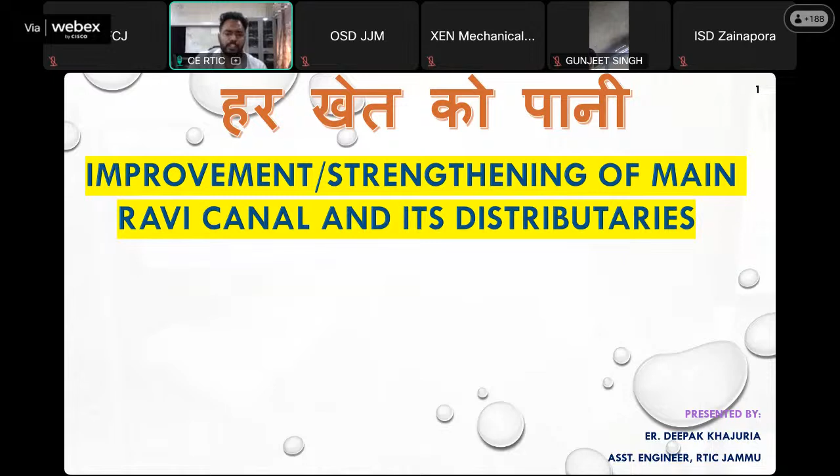Our department is currently working on a project titled Improvement or Strengthening of Main Ravi Canal and its Distributaries, jisme hum apni existing canal network ko restore aur modernize karenge aur saath hi apne distribution network mein kuch naye structures bhi add karenge.

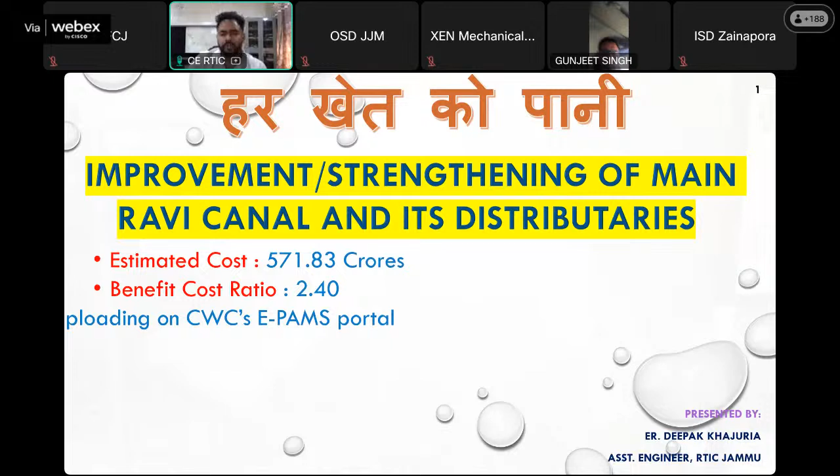इस प्रोजेक्ट की एस्टिमेटेड कॉस्ट 571.83 करोड़ है और इसकी बेनिफिट कॉस्ट रेशियो 2.40 है। ये प्रोजेक्ट हालांकि अभी अप्रूव नहीं हुआ है, इट इज एट द स्टेज ऑफ अपलोडिंग ऑन CWC's EPAMS पोर्टल। आज की इस प्रेजेंटेशन में हम इसी प्रोजेक्ट के बारे में चर्चा करेंगे और इस प्रोजेक्ट की अहमियत को समझेंगे।

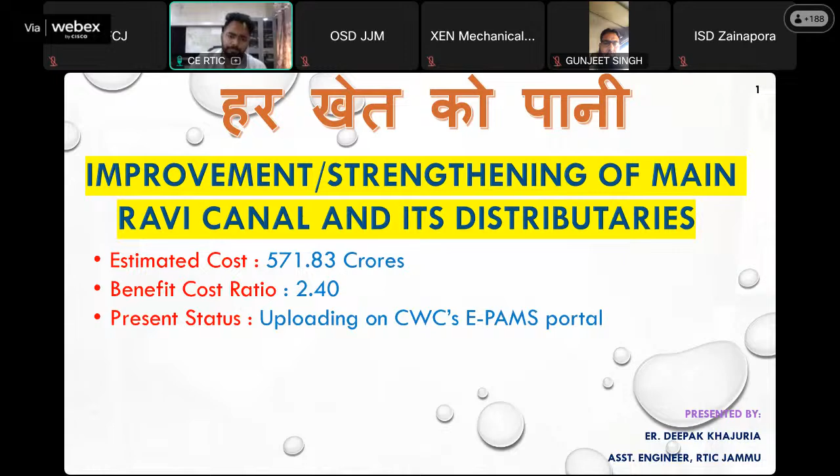देखिए, रावी तवी इरिगेशन प्रोजेक्ट इज बेसिकली अ conglomeration of two canals, namely the main Ravi Canal and the main Tawi Lift Canal, which was envisaged for construction in early 70s.

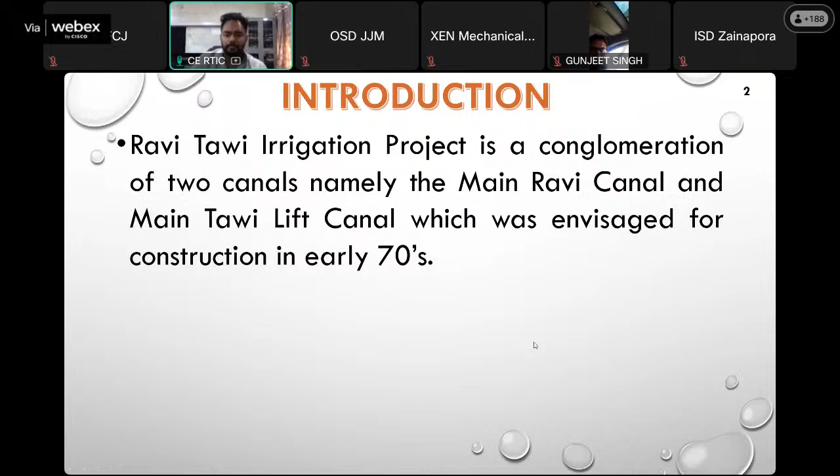आप यहाँ पे जो देख रहे हैं, दिस इज मेन रावी कनाल। अगर हम अपनी मेन रावी कनाल की ही बात करें तो ये कठुआ के बसंतपुर से लेकर विजयपुर के चक सलारियां तक फंक्शन कर रही है, जिसे हम ब्रॉडली दो पार्ट्स में डिवाइड कर सकते हैं।

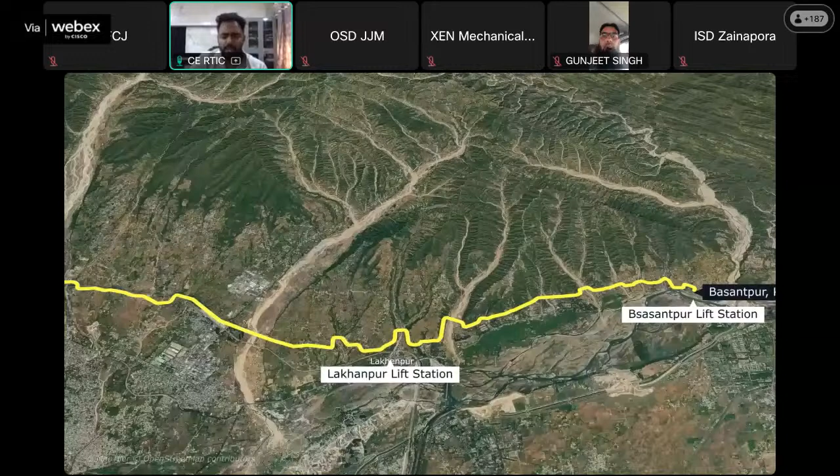पहला हिस्सा बसंतपुर से लेकर उज बराज के लेफ्ट बैंक तक जाता है, जिसमें हमें जो पानी मिलता है वो 2 लिफ्ट स्कीम से मिलता है, लखनपुर लिफ्ट स्टेशन और बसंतपुर लिफ्ट स्टेशन। इन दोनों की रिस्पेक्टिव कैपेसिटीज 200 क्यूसेक्स और 500 क्यूसेक्स है। टोटल कैपेसिटी 700 क्यूसेक्स की होने के बावजूद, ड्यू टू सम शॉर्टकमिंग्स ऑफ दीज लिफ्ट स्टेशंस हमें एमआरसी में केवल 300 से 350 क्यूसेक्स का ही डिस्चार्ज मिल पाता है।

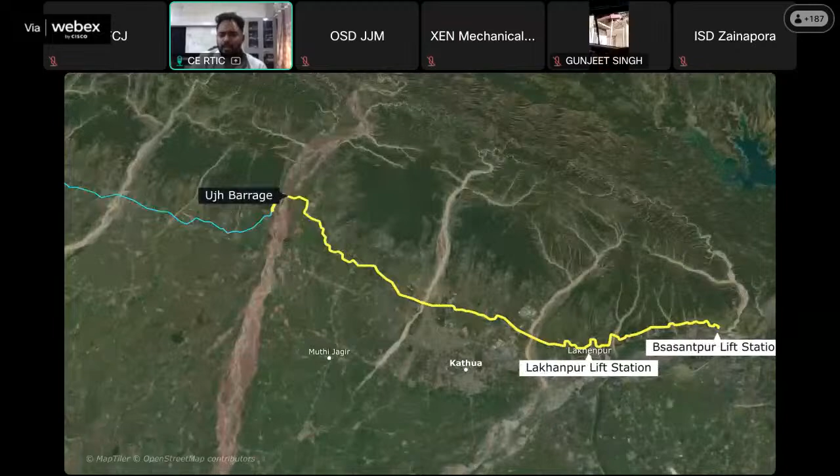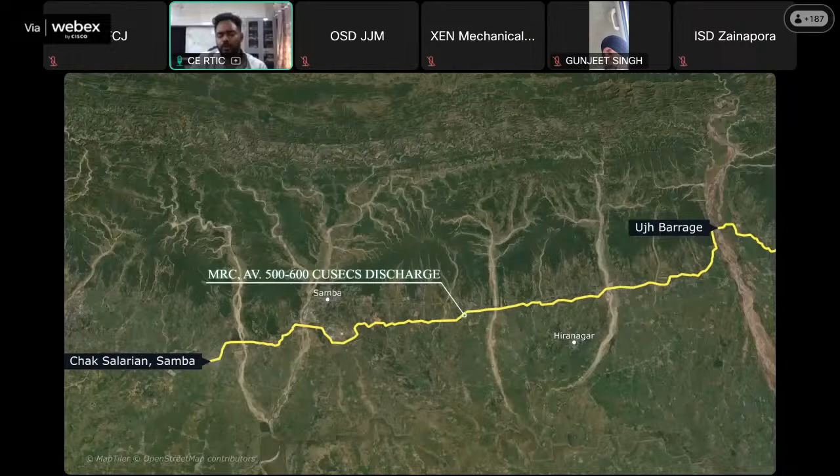दूसरा हिस्सा उज बराज के राइट बैंक से लेकर चक सलारियां तक जाता है, जिसमें हमें जो पानी मिलता है वो उज बराज से मिलता है, जो हमें अमूमन ऑन एन एवरेज 500 से 600 क्यूसेक्स का डिस्चार्ज दे देता है। हमारी इस मेन कनाल का डिजाइन डिस्चार्ज 1150 क्यूसेक्स है, जो कि हमें जल्दी ही शाहपुर कंडी डैम के कंप्लीट होने पर मिलने लगेगा।

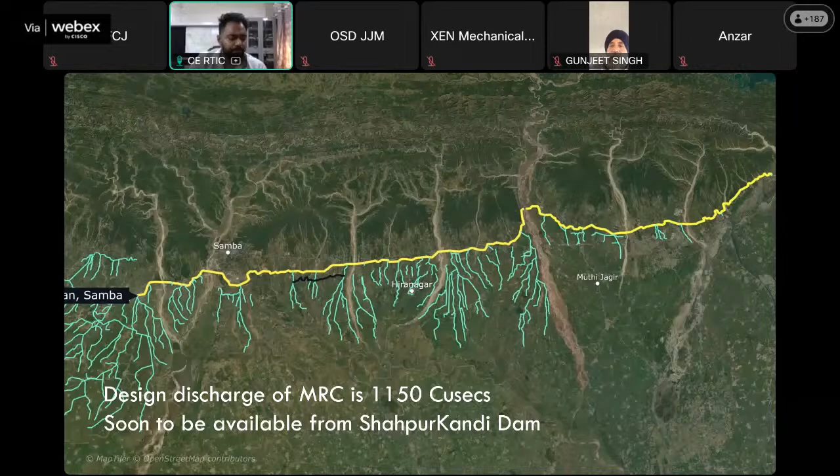एंड टू प्रिपेयर अ कनाल टू efficiently carry and distribute this discharge, this is what our project is all about. Now have a look at some historical background of the Ravi Canal.

देखिए, जनवरी 1955 में जो रावी के पानी को लेकर इंटरस्टेट एग्रीमेंट हुआ था, उसमें जेएनके को 0.69 एमएफ पानी एलोकेट किया गया था। बैलेंस 0.475 एमएफ पानी।

जेएनके को रावी कनाल के थ्रू रंजीत सागर डैम से मिलना था, जबकि 0.215 एमएफ पानी जेएनके करंटली कठुआ कनाल के थ्रू ले रहा है। अब रावी कनाल के थ्रू रंजीत सागर डैम से पानी लेने के लिए 1972 में रावी कनाल की कंस्ट्रक्शन का प्रोजेक्ट फॉर्मुलेट हुआ, जो 1973 में अप्रूव हुआ, एंड फाइनली इन 1975 द कंस्ट्रक्शन ऑफ कनाल बिगन।

1980 के आते आते हमारी कनाल नेटवर्क का 90% कंस्ट्रक्शन पार्ट कंप्लीट हो चुका था, और बसंतपुर से रंजीत सागर डैम तक इसे कनेक्ट करने के लिए हमें 3.25 किलोमीटर की टनलिंग की जरूरत थी, एंड देयर वर अ लार्ज स्ट्रेच जहां की हमें क्लोज कॉन्ड्यूइट्स भी बनाने थे।

सो 1979 में जो इंटरस्टेट एग्रीमेंट हुआ जेएनके और पंजाब गवर्नमेंट के बीच, उसमें ये डिसाइड हुआ कि बजाय रावी कनाल को रंजीत सागर डैम से कनेक्ट करने के, इसे रंजीत सागर डैम से 7.5 किलोमीटर डाउनस्ट्रीम प्रपोज शाहपुर कंडी डैम से कनेक्ट किया जाए।

इससे जो डिफिकल्ट स्ट्रेच था स्टार्टिंग का रावी कनाल का, उसे कंस्ट्रक्ट करने की भी जरूरत नहीं पड़ती, और साथ ही जो बैलेंस पोर्शन की लेंथ थी वो भी रिड्यूस होकर 1378 मीटर रह जाती। और इन एडिशन टू दिस, ये जो 1378 मीटर का स्ट्रेच था, ये भी शाहपुर कंडी डैम अथॉरिटी द्वारा ही बनाया जाना था। सो दिस प्रपोजल वाज वेल एक्सेप्टेड बाय द जेएनके गवर्नमेंट।

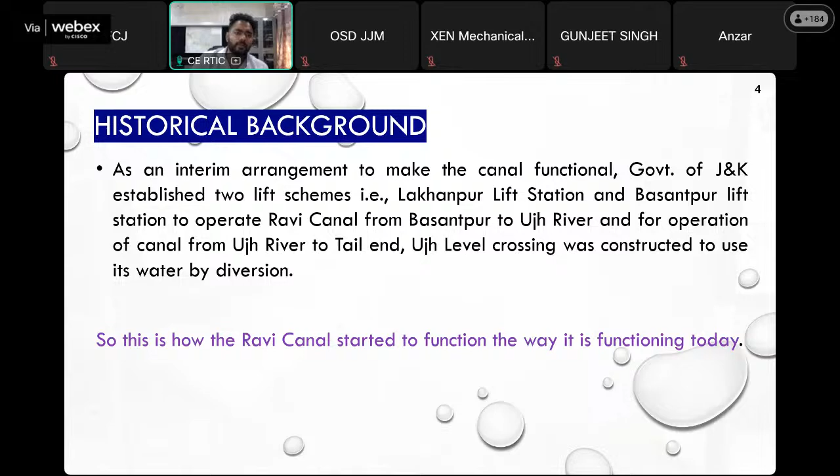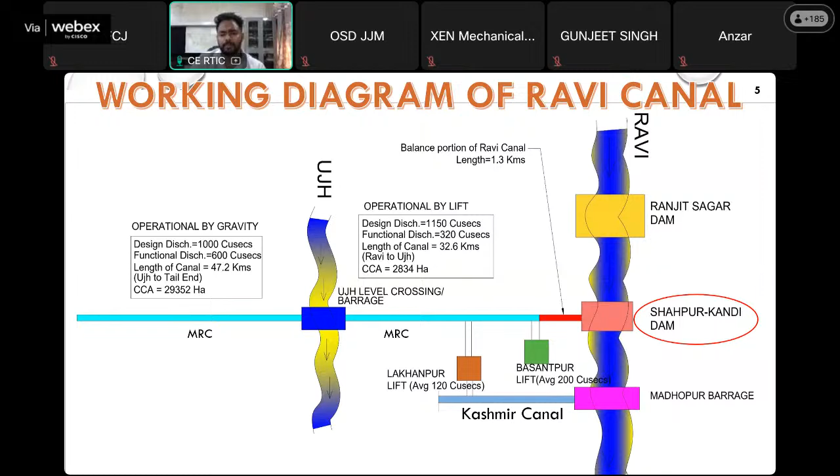अगर हम इसी बैलेंस पोर्शन की बात करें रावी कनाल की, विच इज 1.378 किलोमीटर्स टू बी प्रिसाइज, दिस इज बीइंग कंस्ट्रक्टेड बाय शाहपुर कंडी डैम अथॉरिटी एज पर द एग्रीमेंट साइंड बिटवीन द गवर्नमेंट ऑफ जेएनके एंड पंजाब। Almost 90% of the work has been completed and is expected to complete by June 2024 as stated by Shahpur Kandi Dam Authority.

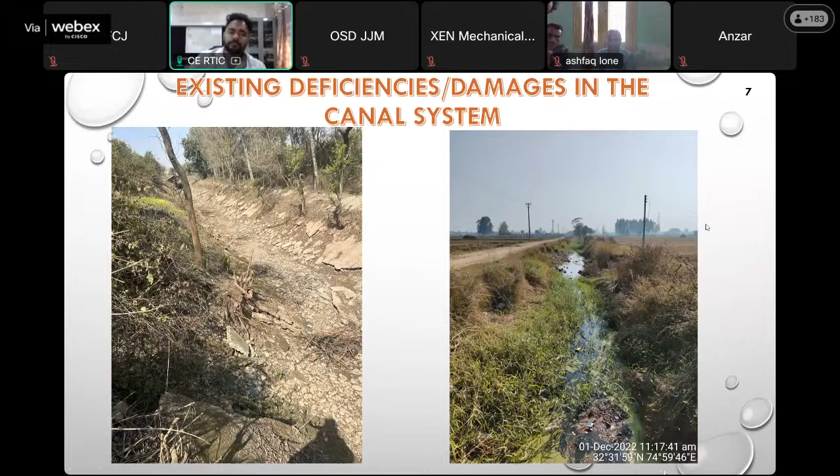So there are many existing deficiencies in the canal system. Due to insufficient funding and subsequently lack of proper maintenance, the canal system is in damaged condition over the past several years. The distribution system particularly is in bad shape and has lost its design carrying capacity. Several structures and the canal lining have been damaged. There's extensive growth of vegetation and plants inside the canal prism. There have been recurrent breaches and slips in several vulnerable embankment reaches. The deep cut reaches have suffered extensive damages due to slope slip, rock falls, collapsed lining, etc. So the net result is a significant reduction in the irrigated area in comparison to the command area.

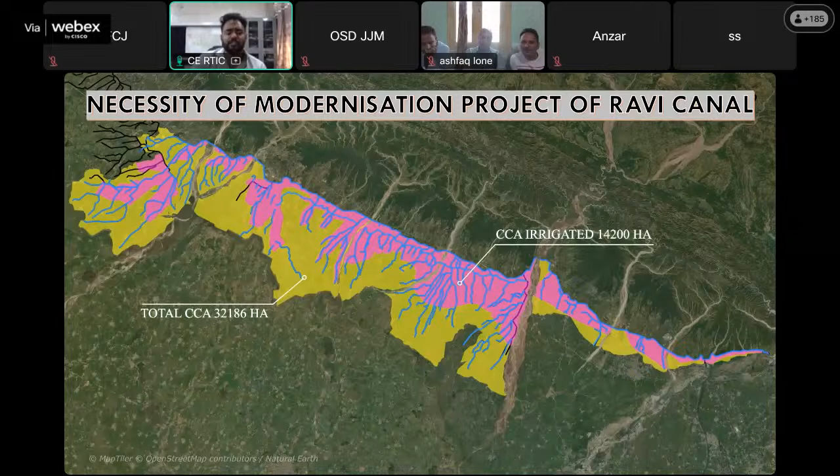Now these are some of the salient features of the Ravi Canal. Source of water is of course river Ravi. The type of canal is a contour canal. In simple terms, a contour canal is one which traverses almost parallel to the contour lines. Because of this, only one side of its course is irrigated by this type of canal. And if we talk about Ravi Canal, it irrigates its left side.

If we talk about the cultivable command area, which is 32,186 hectares, making up 79,500 acres, with an irrigation intensity of 168%, which makes the ultimate irrigation potential equal to 54,072 hectares. One thing I'd like to point out here is that this CCA is among the largest CCAs in the J&K Union Territory.

The length of the main canal is 79.8 kilometers. The length of the distribution canal system is 520 kilometers, and mind you, this distribution network is the largest individual canal network in the whole Union Territory of J&K. The bed grade of the canal is 1 in 3,300 meters. The design discharge is 1,150 cusecs, and again, this is the highest among all individual canals in J&K UT.

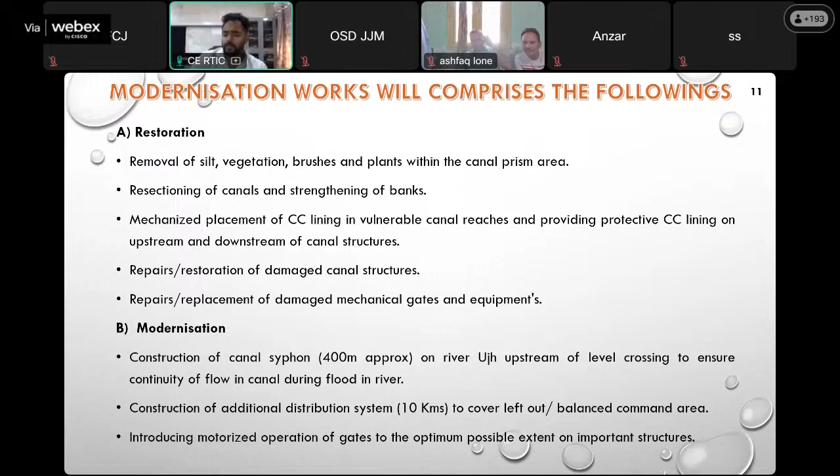Now, this is a general abstract of the work. As you can see, out of the 79.8 kilometers of total length of the main Ravi Canal, we are taking up 37.55 kilometers of the length under modernization, and this covers mostly the filling stretch of the main Ravi Canal.

Out of 46 siphons, we are taking 27 siphons under the modernization. 8 out of 9 aqueducts and 6 out of 10 escape gates are also taken under the project.

In the distribution network, the total length of 520 kilometers, we are taking up 239.25 kilometers out of it for the modernization. And out of a total 730 other structures, we are covering 456.

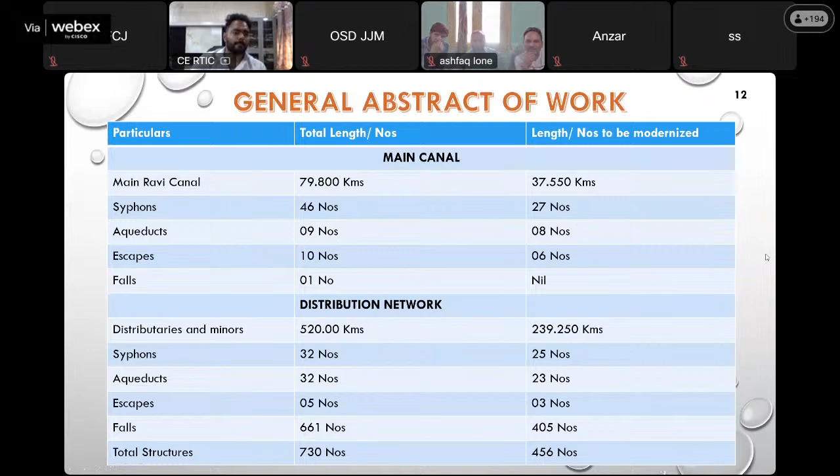These are some salient features of the detailed project report. The districts covered under the project are Kathua and Samba. The tehsils that come under are Kathua, Marheen, Hiranagar, Ghagwal, Rajpura, Samba, Vijaypur, and Ramgarh.

The project cost is rupees 571.83 crores. The benefit cost ratio is 2.40. Ultimate irrigation potential is, of course, 54,072 hectares, as mentioned earlier, and the beneficiaries are 7,544 families.

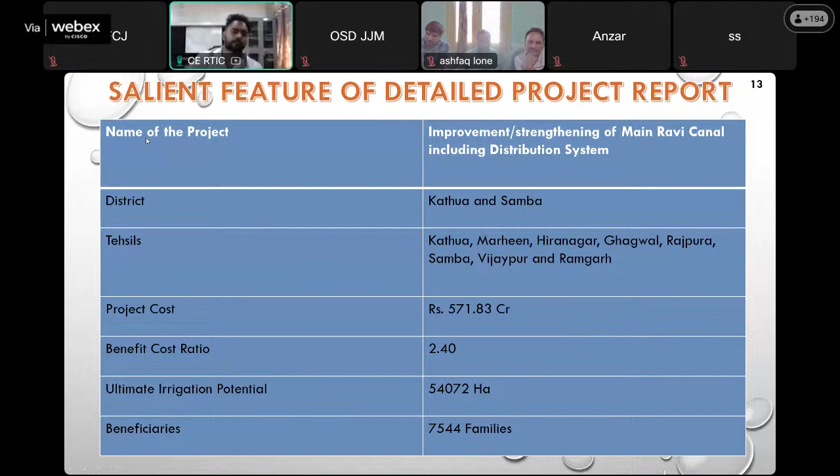Now, in the implementation of the project, there are some challenges as well. Let's have a look at the pre-approval challenges of the project first.

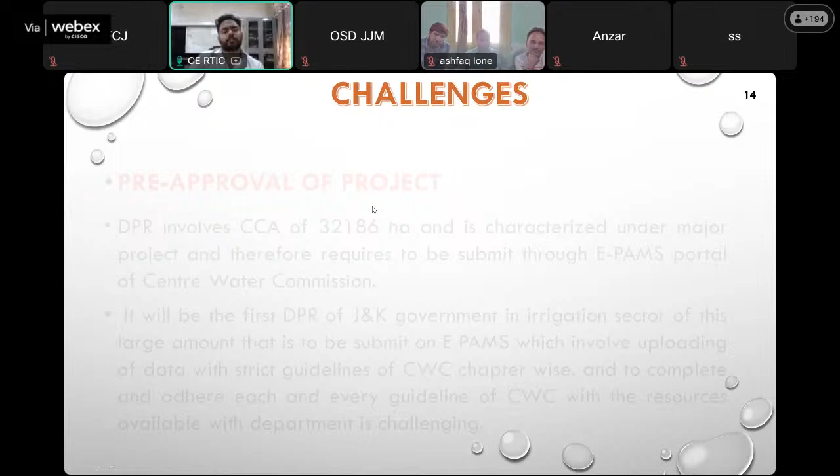The DPR involves CCA of 32,186 hectares and is characterized under a major project, and therefore requires to be submitted through the EPAMS portal of the Central Water Commission. It will be the first DPR of J&K government in irrigation sector of this large amount that is to be submitted on EPAMS, which involves uploading of data with strict guidelines of CWC chapter-wise, and to completely adhere to each and every guideline of CWC with the resources available with the department is challenging.

Now, there are some post-approval challenges as well regarding the project. For the execution of work in the functional canal, there has been only 3 months working time available, which is the closure period.

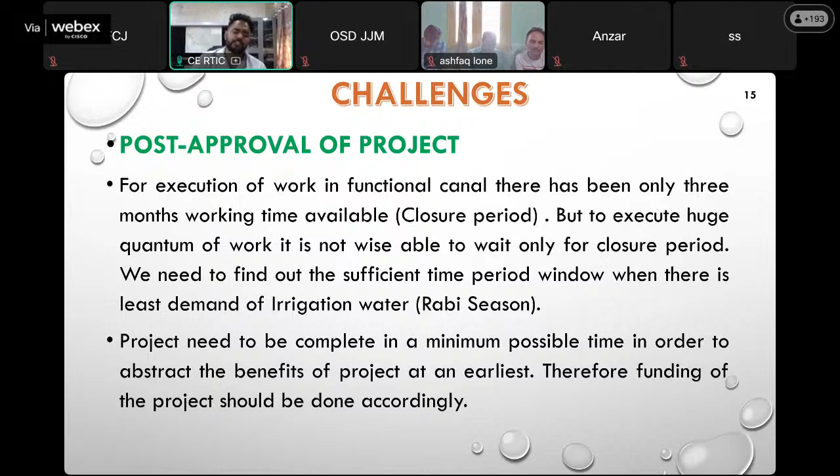Now, here is a briefing of whatever we have discussed earlier. The project of improvement and strengthening of main Ravi Canal and its distributaries is of utmost importance, and the canal network is spread in 2 districts irrigating the arid region, and it has a potential to irrigate a significantly larger area than it is irrigating presently.

It took so long to get the allocated share of Ravi water, and when it is at our doors, we should better be prepared to receive that share that belongs to us with both hands. Ravi Canal irrigation is among the largest irrigation networks in the Union Territory, and with the approval and execution of the project, it will be able to operate at its full potential, and then we could proudly say, yes, we have provided har khet ko pani.

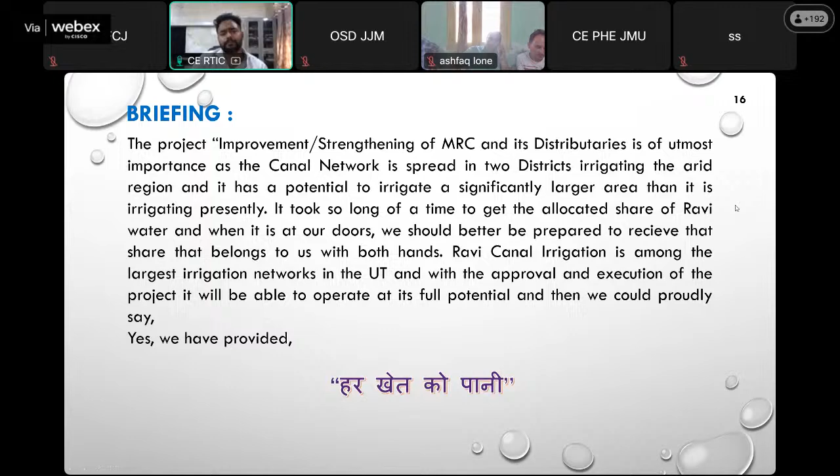Well, the presentation doesn't end here. There are some additional benefits of the project. One of them is saving in groundwater usage.

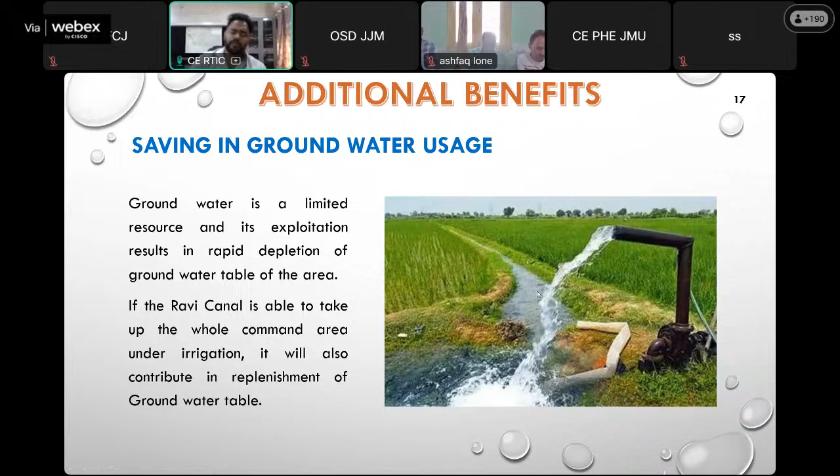I'm Shakil, Executive Engineer, PHE, Budgam. Hello sir, good evening.

When you were preparing the survey and DPR, had you hired any consultants for the same? No, it was all done in-house by the department itself. Only the department personnel engaged in this, sir. We have not consulted any consultants.

My question is, are there any measures put in place for measuring the discharge of the canal at any point of time? And what is the velocity when you have a 1 in 3,300 meter bed slope?

The velocity we are having is almost 1.3 meter per second, sir.

To all the participants and the chair, I, Nawaz Ahmad Bhat, Executive Engineer, Jal Shakti Kulgam, am going to present on planning and designing of the water supply scheme. The basic objective of planning a water supply scheme is to supply safe and wholesome water to the consumers.

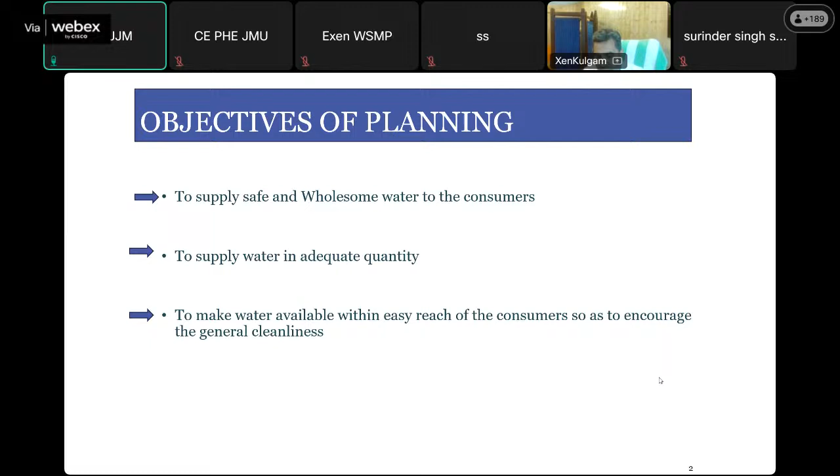Nawaz sir, your voice is not that clear, please go nearer to your system. The basic objective of planning is to supply safe and wholesome water to the consumers, to supply water in adequate quantity, and to make water available within easy reach of the consumers so that there is general cleanliness.

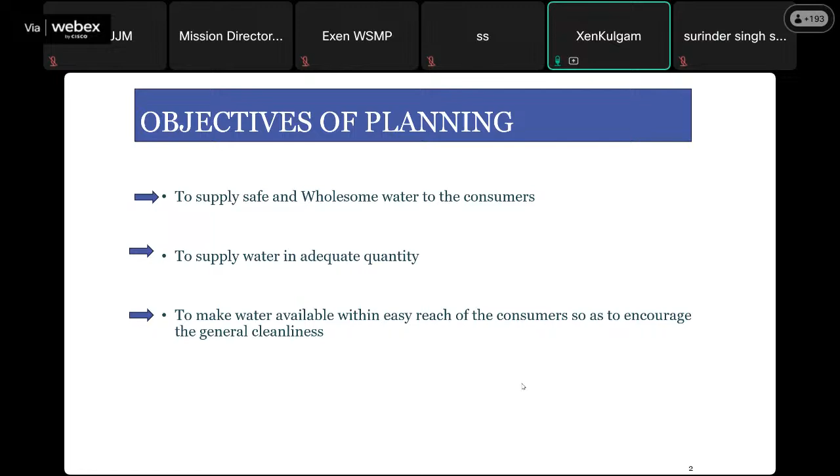The planning of a water supply scheme, sir, depends on these factors: the source, the quantity or quantum of water required, the quality of the raw water, the rate of consumption of water, the topography of the area, and the future demands.

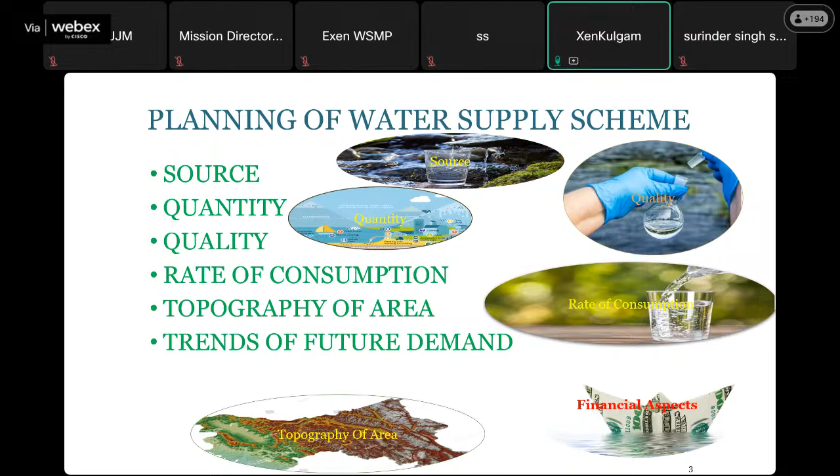These are the main factors that govern our water supply scheme, that govern the planning as well as the design of the water supply scheme. Out of these various factors, we have two factors, the source and the topography, that govern the type of scheme that we should plan.

If we have a sufficient quantum of water available and the topography is favorable, so that we can maintain the functionality requirement of the consumers and maintain a requisite pressure, which as per CPHEEO guidelines is 7 meters for a single story building, then we can go for a gravity scheme.

However, if the source is available but the topography is such that water can't flow by gravity from our source to our end users, then we have to go for a lift scheme. So these two factors are mainly responsible for selecting the type of scheme.

Whereas factors like quantity, rate of consumption, and future demands would give us the design of the pipe, how big our scheme should be - that is the diameter of the pipe.

In rural areas, we have small hamlets, usually 300 households, 400 households, or at max 600 households. So the design of pipes would be accordingly. Mostly it goes to 150 mm to 200 mm, and in case it is a multi-village scheme, it can go up to 300 mm, not more than that.

Then there's the quality of the raw water. The quality of the raw water would give us the type of treatment that we should adopt. If there is smell or odor in the raw water, then we have to go first for aeration.

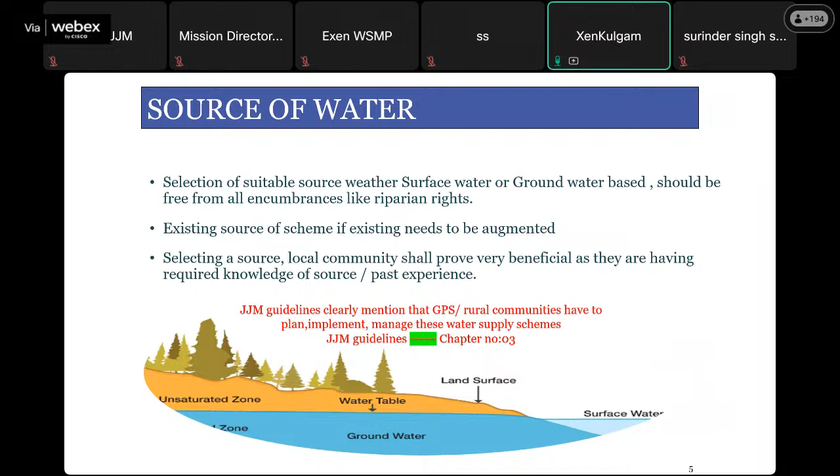Planning of the siting and location of the structures. So this infrastructure needed for a particular water supply scheme - the filtration plant, the sedimentation tanks, the storage reservoirs - would solely depend upon various factors, out of which topography plays an important role.

It's the topography that governs where our filtration plant should be, where our storage structure should be. Should my filtration plant and the service reservoir be located more towards the source, or more towards the population, or in between? That all depends upon the topography of the area.

So for an efficient water supply scheme, we have to calculate the exact location of these two important infrastructure units of the water supply scheme.

If it is located too much towards the source, then the water drawn from the pipes towards the community - we know that for all those pipe networks that come from the SR, they need to be designed not only on the value of Q, the water requirement, but on the value of Q multiplied by the peak factor. That peak factor, as per the CPHEEO manual, is 3 for a small water supply scheme, as well as for schemes having population less than 50,000.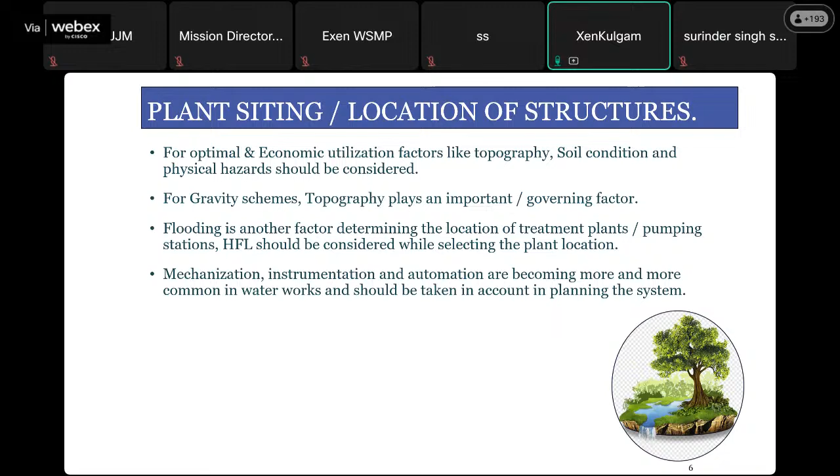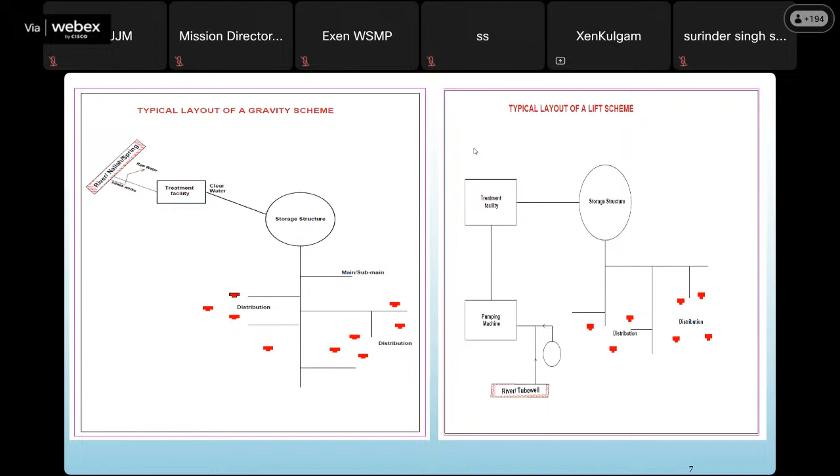This is a typical layout of a gravity scheme and a lift scheme. We are having a treatment facility, then storage structure in a gravity scheme, and in a lift scheme also we are having this. So this has been elaborated here.

We are having a Nala or a river, then there is a treatment facility, then a storage structure. The distance from Nala to treatment is L1, treatment to storage is L2, and storage to the community is L3. For proper planning and efficient functioning of a water supply scheme, all these values L1, L2, and L3 should be so chosen that we have an efficient water supply scheme.

We have some design criteria available with us that govern these lengths. For example, for L3, the CPHEO says that we should have a hydraulic grade line of 1 to 4 per 1,000. This hydraulic grade line, on the left hand side, is the summation of all those points which are below the energy line, minus velocity head, and minus the head loss in the pipes.

So here I have a simple calculation that the head loss in the pipes - it's a famous formula that we use, and through which we calculate the diameter of the pipes. It is L times Q by CR, where CR is a coefficient which depends on the material of the pipe, and then there is the diameter of the pipe. So the head loss is inversely proportional to almost D to the power of 5.

That means as per our CPHEO manual, HF plus velocity head should be 1/1000 to 4/1000. So L3 you can fix in that way.

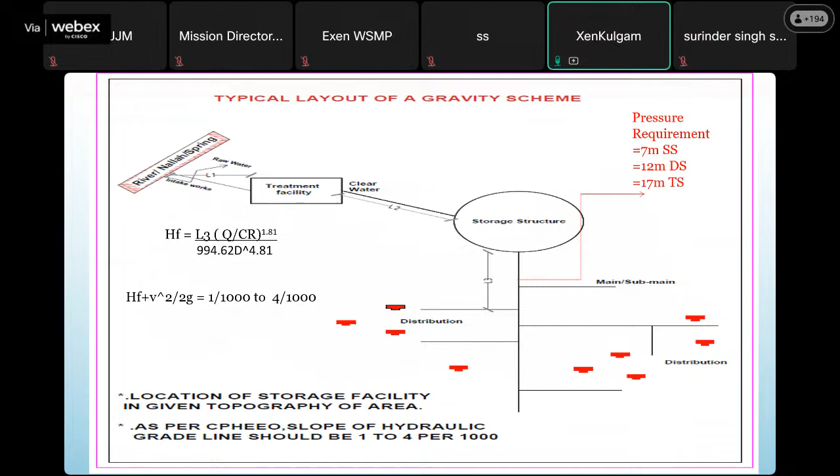Let us take a typical example that we have done here also in Kulgam. We are having an RSFP and an RCCSR. The RCCSR depth usually varies from 3.5 to 4 meters, and then the RSFP. For constant surveillance on all my water supply infrastructure, it's better to construct the RSFP and SR just nearer to one another, so my L2 may vary from just 10 feet, 20 feet, or at max 30 feet.

So the water coming from the RSFP would be at a height of 0.6 to 0.9 meters from the natural surface level. That natural surface level at which the water comes out from my RSFP should form the top level of the SR. So when the SR is 4 meters deep and the natural profile is 1 in 70...

the supply line that we have to lay from the SR would involve excessive excavations. When these excavations are done for a considerable length, they are sometimes met with other problems - like if there is a nearby canal or the water table is near, there may be a dewatering problem. So we have to resort to heavy motors for dewatering, or we have to go for close timbering.

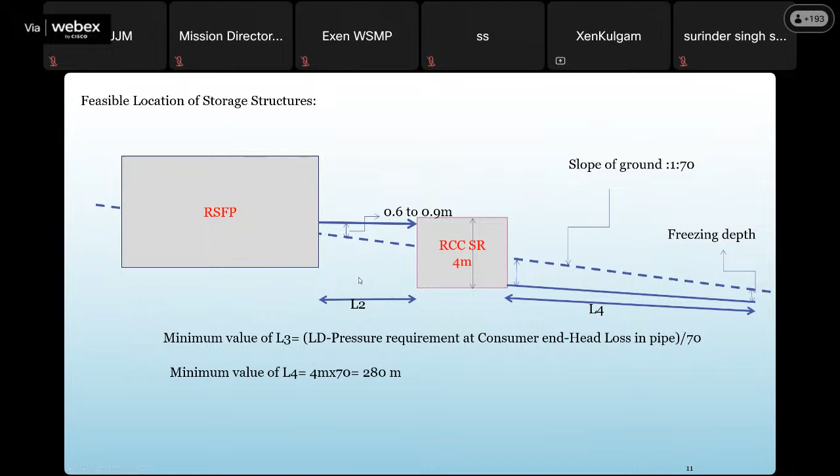Then comes the quantity of water. The quantity of water required for a particular water supply scheme, as per the JJM guidelines, is 55 LPCD. The CPHEO manual gives the LPCD criteria for towns, cities, and metropolitans as 70, 135, and 150. Plus, there are some institutional needs that have to be added to our total water requirement.

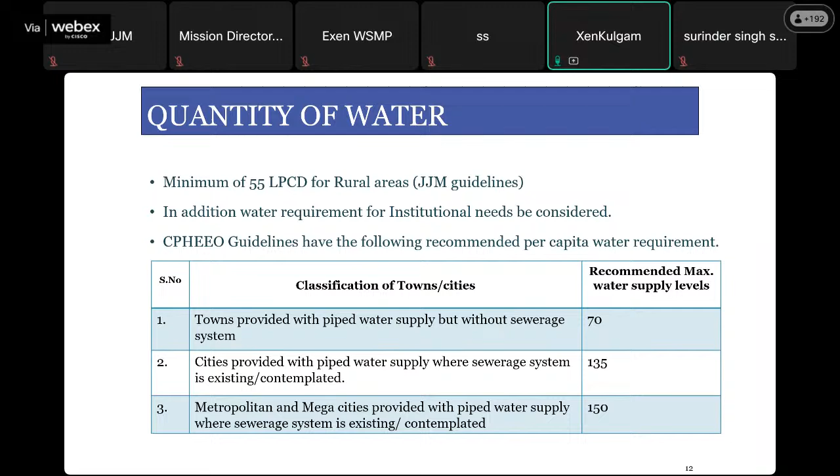There is one more water requirement that we have to count and add in the design of our water supply scheme: firefighting. It plays an important role in case of towns and cities. As per the CPHEO manual, we have to have a provision for firefighting water requirement.

So for a population of 50,000, CPHEO says that we should have almost 70 kiloliters of water for firefighting. And out of this 70 kiloliters, that's almost 1.5 lakh gallons, 1/3 of it should be our dedicated supply, available in our SRs all the time.

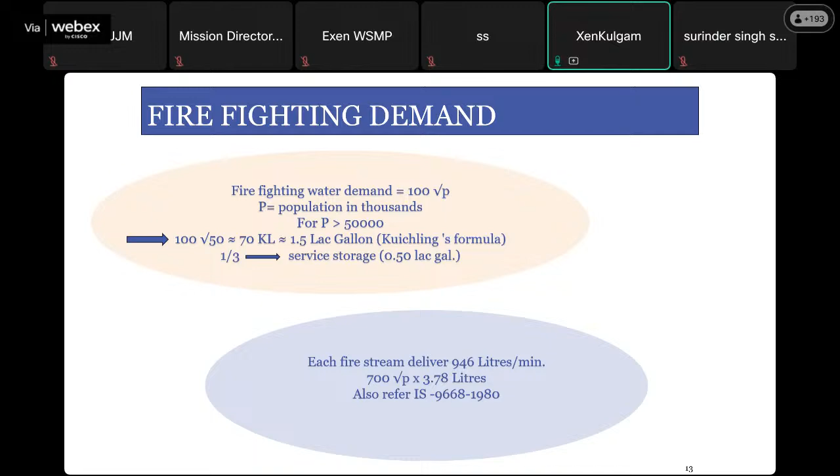So this firefighting water demand plus the domestic demand plus the institutional demand, all give us the total value of the water that would be required for a water supply scheme.

Then comes next, the pressure requirement. At the consumer end, CPHEO says we should have a pressure requirement of 7 meters for a single story building, 12 meters for a double story, and 17 meters for a 3-story building.

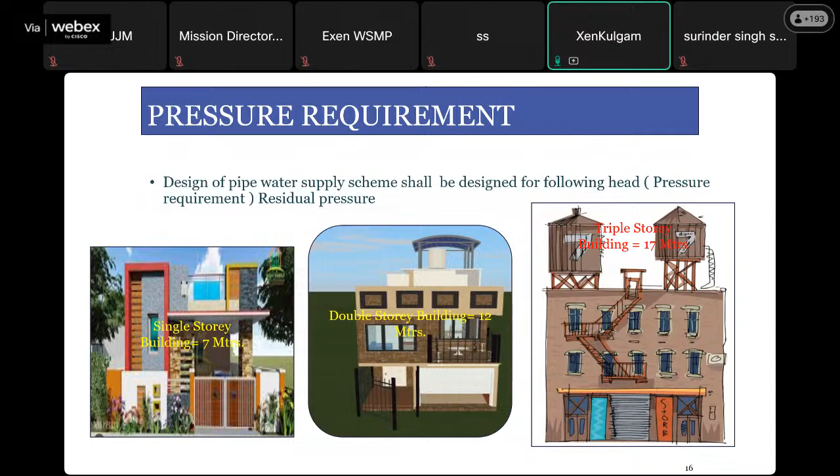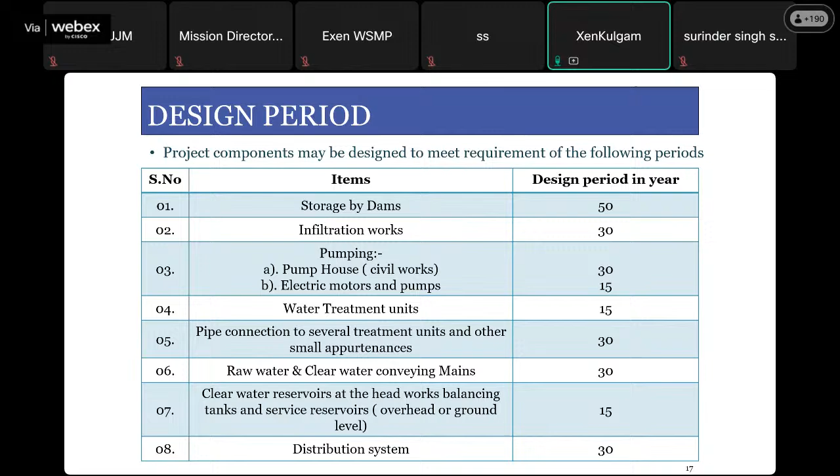We can add another water treatment plant after 15 years, but it will be very difficult for us to lay a separate raw water line or a separate distribution line after 15 years. So all the lines should be designed for 30 years, pump houses should be for 30 years, and electric motors for 15 years. Then comes the transmission of water.

In the planning and designing of a water supply scheme, we can transmit water either in an open channel or in a pressure conduit. Mostly, open channel flow we are restricting to the intake works only, say up to a length of 100 feet or 200 feet. But the pressure conduits are mainly

the ones which we are using in our water supply scheme. Pipes are the main pressure conduits which we use for transmitting the water.

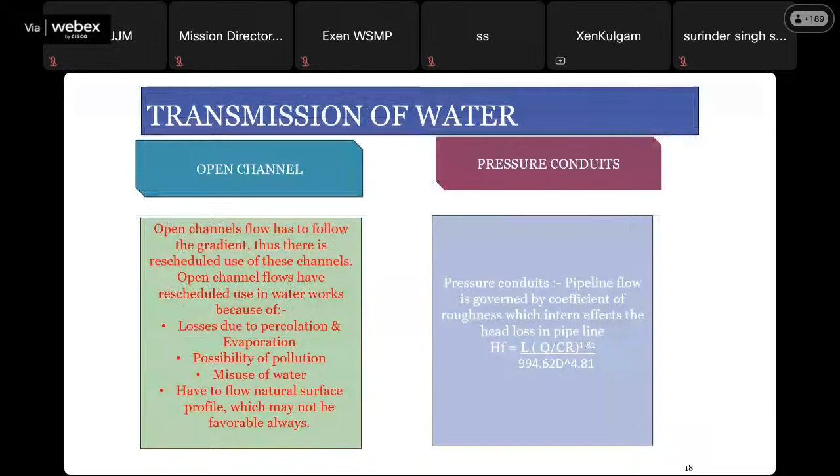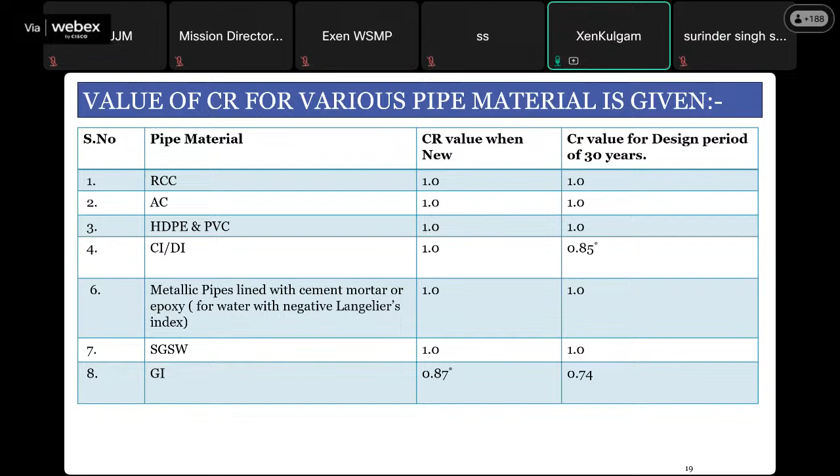The pipe material, selection of pipe material, is another important factor to be taken into account for water supply schemes. The pipe material has some value of CR, that is the coefficient of roughness. For CI/DI pipes, it is 1 when new, but it reduces to only 0.85 when the design period is 30 years.

So selection of pipe material depends on durability, lifespan, installation, laying, jointing, and choice of the pipe material. In fact, the CPHEEO manual gives us a detailed account of how we can select a particular pipe. It gives marks from 1 to 10 for durability, for lifespan, and the pipe with the highest number, we can select it.

But we are mostly having factors that govern these pipes: internal roughness, life and durability, and operation.

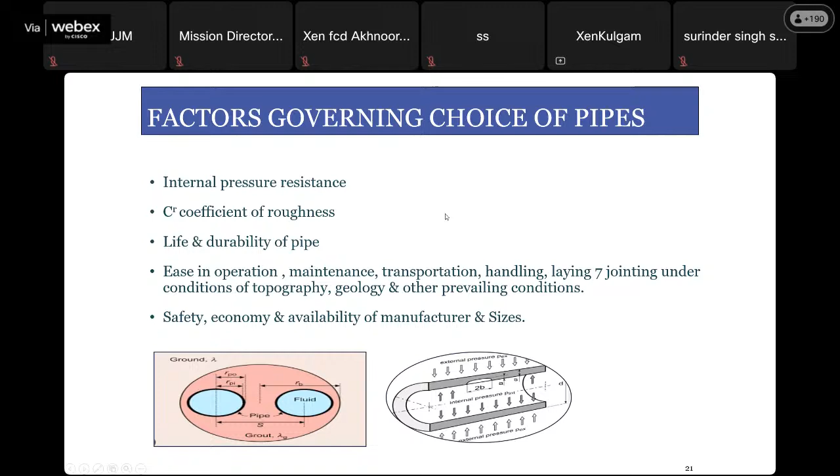DI pipes are mostly used in our water supply schemes. They are used because of the easiness in jointing, flexibility, and in negotiating curves, which is not possible in case of other materials like GI or CI material.

In CI material, jointing is extremely difficult. Likewise in GI pipes, jointing is difficult. With flanges we can somehow achieve progress, but still jointing is difficult, especially in negotiating curves. So DI pipes are designed as K7, K8, and K9, depending upon the thickness and the pressure they can handle.

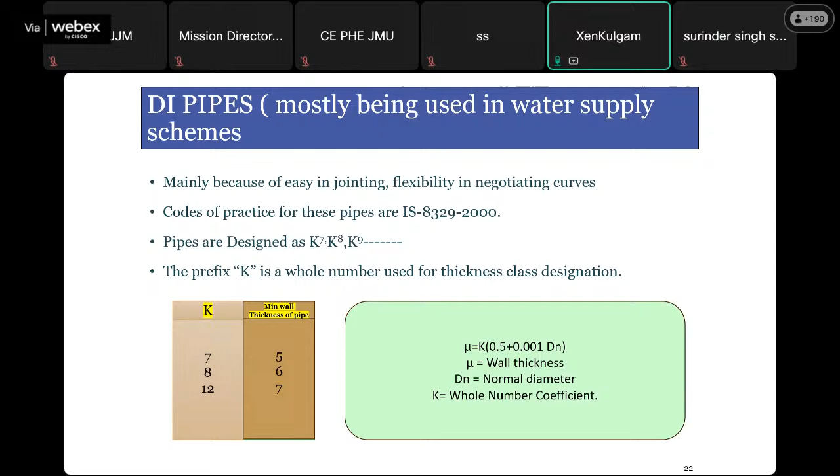K7 pipes can handle pressure up to 0.6 MPa, K8 up to 1.2 MPa, and K9 up to 1.8 megapascal. If we convert these pressures into heads of water, K7 can resist a head of 60 meters, K8 can resist 120 meters, and K9 can resist 180 meters.

So all water supply schemes should be checked whether they can resist this much pressure. If they can't, then when we close the valves, there should be some arrangement of safety valves so that when the main sluice is closed, the safety valve gets operated. Otherwise, the pressure will get exceeded and there will be problems in the pipeline.

Especially those pipes which are having large lengths and higher level difference between the source and the treatment plant.

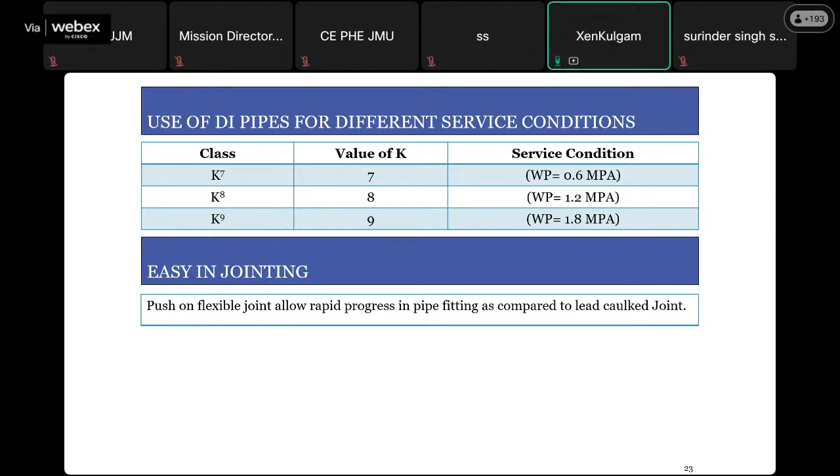Or else we can keep our pipe within this pressure by resorting to break pressure chambers. We can break that pressure at a particular location. A concrete box can be made so that the water is open to the atmosphere, and then it will start again going in the pipes.

We have two types of joints used in DI pipes and CI pipes. In DI pipes, we have push-on joints and lead joints. In CI pipes, we have lead caulking joints.

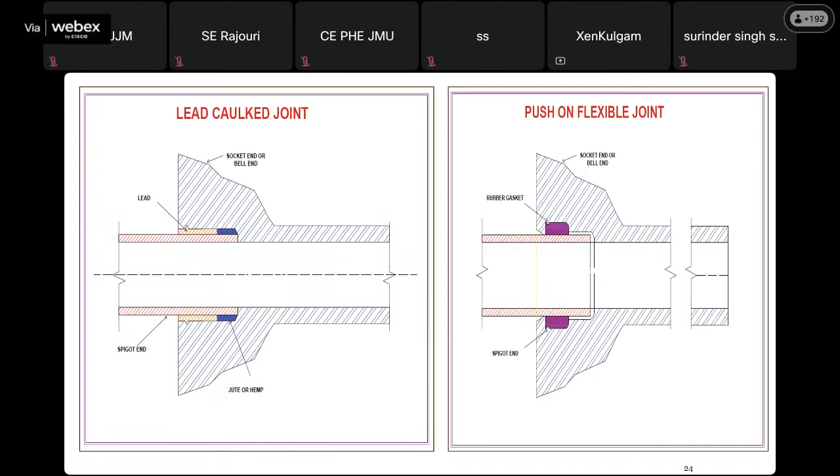Mostly DI pipes are very flexible. They are easy to negotiate in curves. There is no skilled labor involved in jointing these, whereas much more skill is needed for CI pipes. In DI pipes we have ease in deflection, about 5-degree ease, meaning we can negotiate curves. That's not possible in GI pipes or CI pipes. Plus, we can achieve much more progress with DI pipes.

Then comes the pipe design, which means determining the diameter of a pipe. This is defined by the Hazen-Williams formula, used to calculate the head loss in a pipe. We know we are having two fixed points.

We have the source available and we have our habitation or village available. In between, we know where to locate our structure, that is where to locate the filtration plant and where to locate our SR. Based on that data, we can calculate the head loss in a particular pipe.

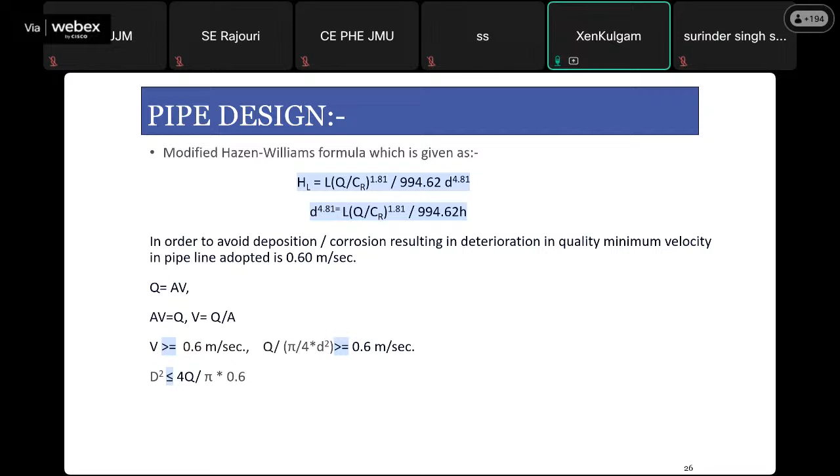Based on that head loss, we have to assume some value of the diameter, then calculate the HL, and based on that we can calculate the pipe diameter for the whole water supply scheme. Plus, the CPHEO manual gives us that for raw water main, we should have a minimum velocity of 0.6 meters per second so that we may avoid deposition or corrosion that may result in deteriorating the quality.

That means the discharge in those pipes would be the discharge multiplied by the peak flow or peak factor. For population less than 50,000, we have a peak flow of 3, then for 50,000 to 2 lakh, 2.5, and so on. For small water supply schemes, we have a peak flow of 3.

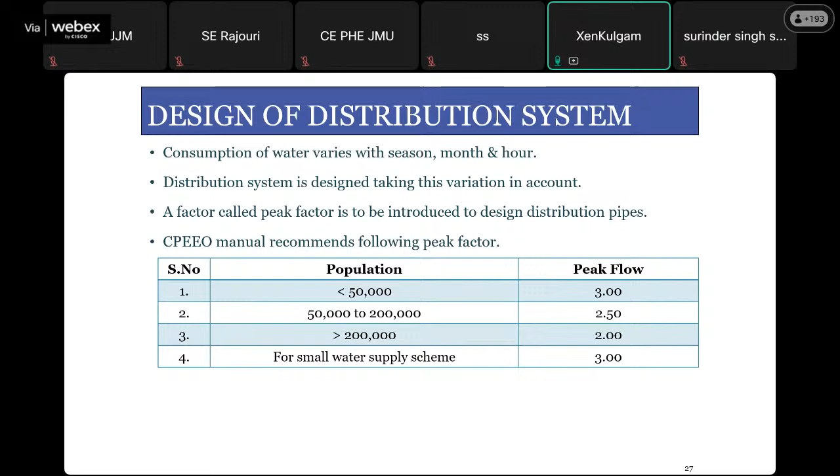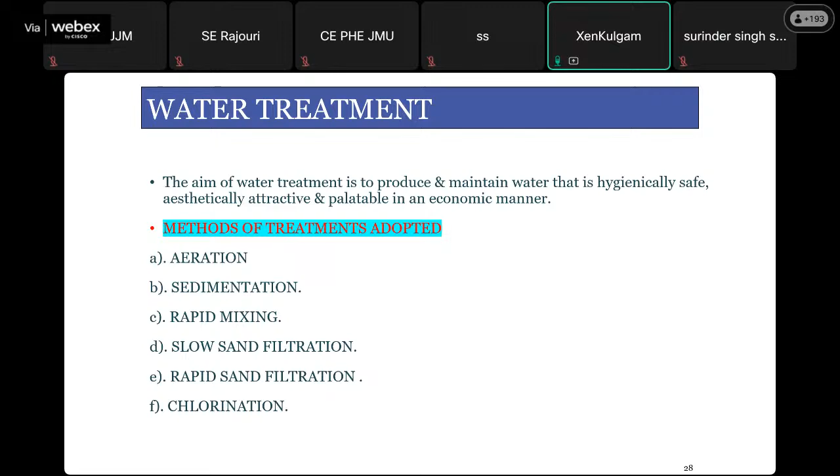Then comes water treatment. The aim of water treatment is to produce and maintain water that is hygienically safe, aesthetically attractive, and palatable in an economic manner. The treatments that we adopt are aeration, sedimentation, rapid mixing, slow filtration, rapid filtration, and chlorination. The CPHEO manual gives us guidance that we should follow in selecting the type of treatment for a particular water supply.

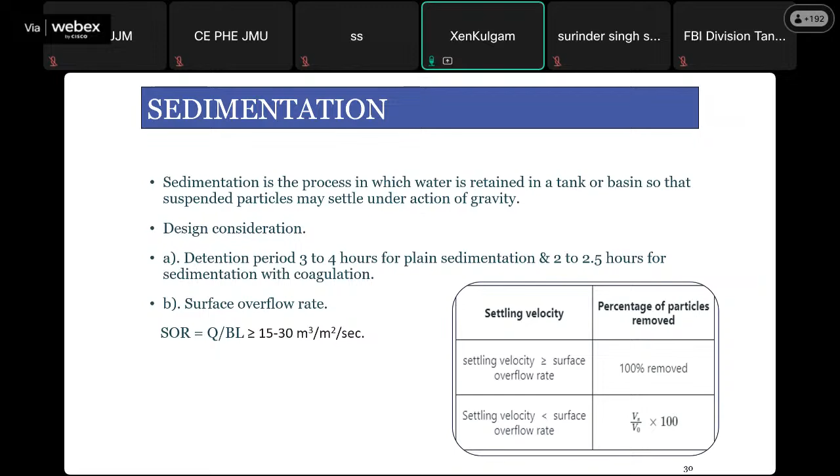The design considerations as per the CPHEO manual: we should have a detention period of 3 to 4 hours for plain sedimentation, and if we are using alum or ferric sulfate, it would be 2 to 2.5 hours. Plus, we should cross-check the dimensions arrived at using this detention period with the surface overflow rate, which is discharge divided by breadth and length, the plan area of the sedimentation tank. This should be more than or equal to 15 to 30 cubic meters per square meter per second.

The aeration mostly used in water treatment plants is cascade aeration. This is only used when water has iron content or has a smell, so we go for cascade aeration. However, in our rural areas, we don't resort to this aeration because we don't have that problem, since we have either surface water available or tube wells that don't have this issue.

So then we go for rapid mixing. In rapid mixing, we use a chemical called alum, that is aluminum sulfate. The mechanism is that it mixes with the dirt and forms floc, which then settles down.

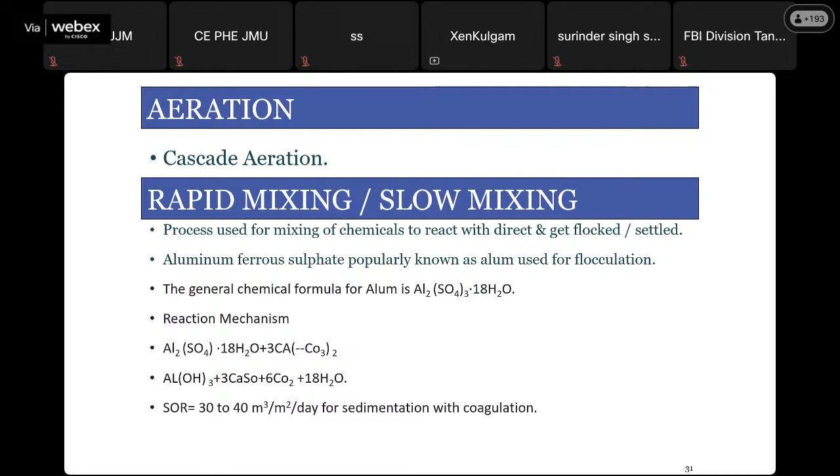The CPHEEO manual has given a specific requirement for sedimentation tanks regarding the inlet and outlet arrangement. The purpose is that we should not have short circuiting of the water. The aim is that water should settle and rest in the tank. If there is no proper arrangement of the incoming water, there will be short circuiting, where water comes from one side and flows out the other side without having proper retention time. The CPHEEO manual clearly gives us the type of inlet arrangements we should have for our sedimentation tank.

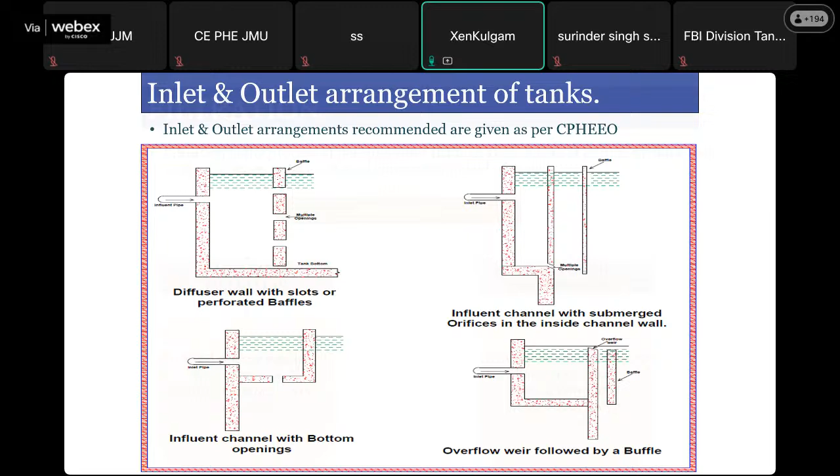Next comes the filtration. In the filtration process, we may use slow sand filtration or rapid sand filtration. When the raw water has less than 20 turbidity, we may go for slow sand filtration, and when it has more than 20, we can go for rapid sand filtration.

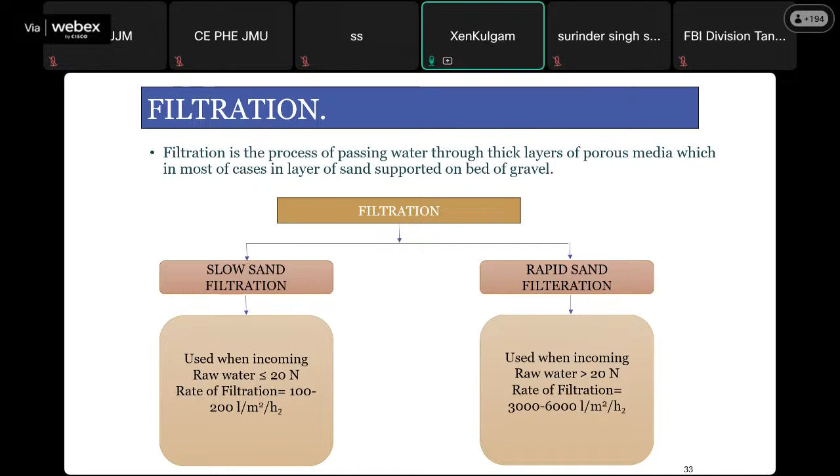Filter problems include formation of mud balls, cracking, and clogging of the filter media. This means the rapid sand filter is much more of a skilled job. We have to do proper backwashing and must constantly monitor how the rapid sand is behaving, to check whether the turbidity of raw water coming into the filtration plant is actually getting reduced or not.

The power consumption in a filtration plant in rural areas, which handle 0.1 to 1 or 1.5 MGD, requires some power consumption for which we need a substation. We have air blowers, backwash pumps, bleaching pumps, which are just 7 to 10 HP, 5 HP, and alum mixing units. These are all required for efficient water supply and treatment facility.

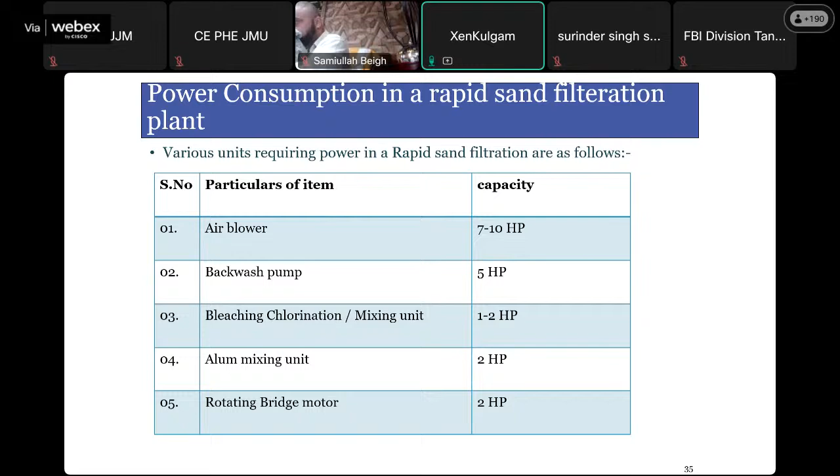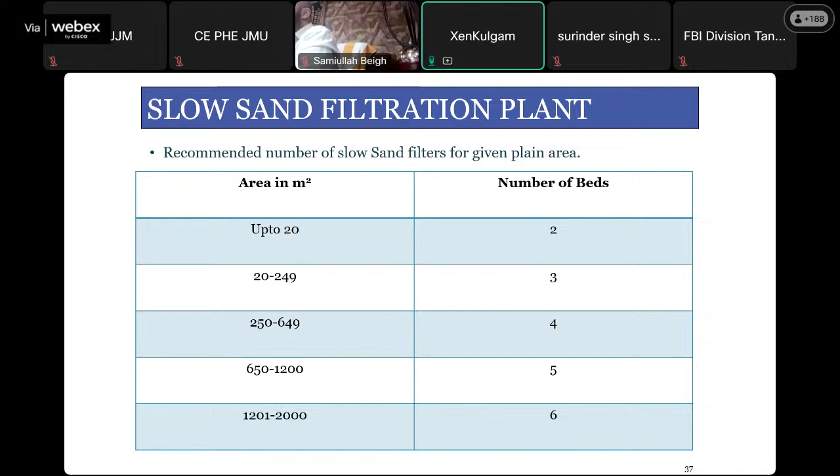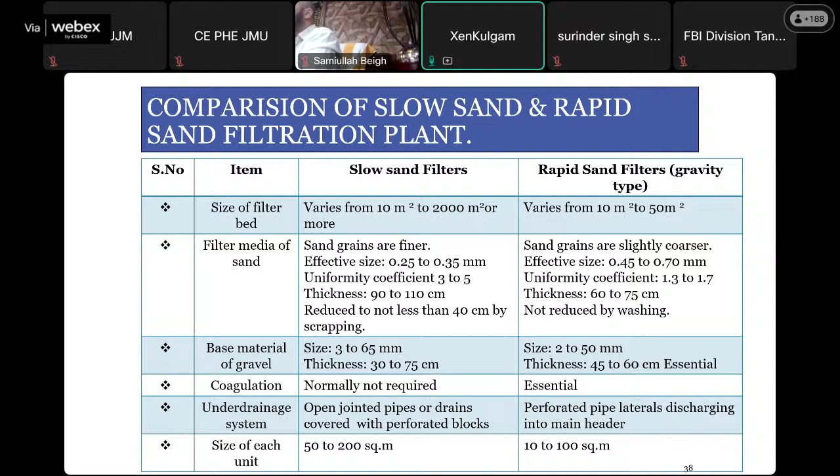So this is the filtration plant comparison between the two: the size of the filter bed, filter media, base material - almost everything. The main difference between them is that slow sand filtration is required for smaller units, and rapid sand is required for larger units.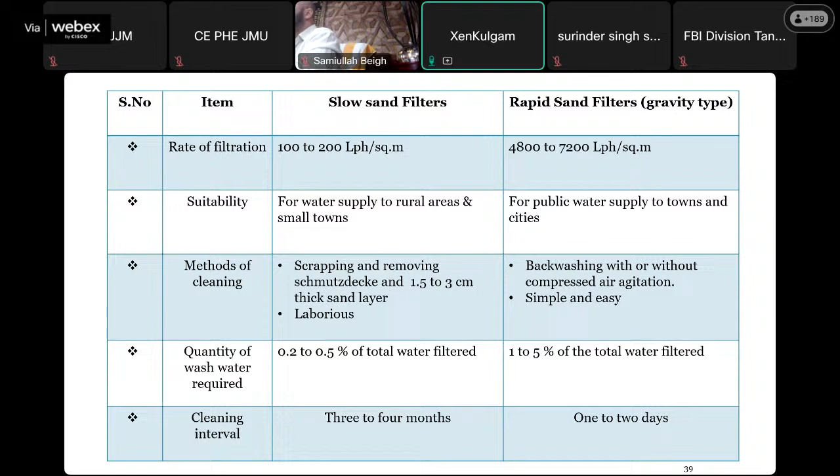For suitability, slow sand is used for smaller areas and smaller towns, while for larger towns and cities we go for rapid sand. The cleaning method for slow sand is to scrape and remove the top layer. However, in rapid sand filtration, it's 24-hour washing, where almost 5% of the water is used for backwashing.